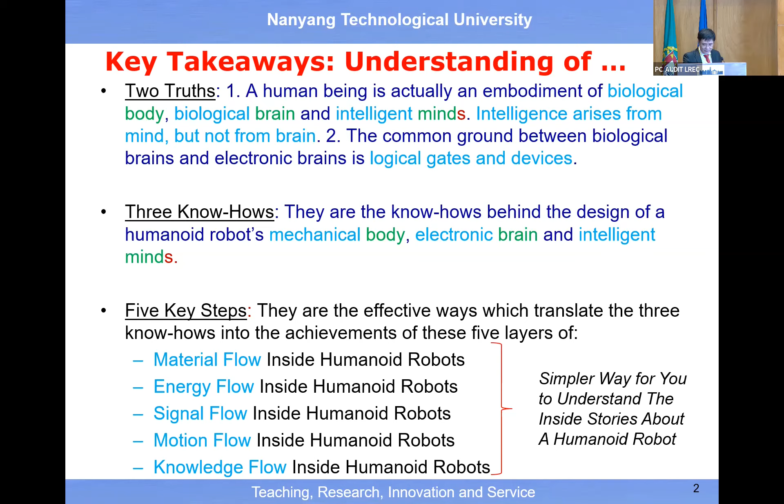Then in order to help us to understand how to translate these 3 know-how into solutions for the achievement of the design of humanoid robot, I try to group all the related topics into these 5 layers of flow: material flow, energy flow, signal flow, motion flow, and then lastly, knowledge flow, right? So I can skip the introduction about myself. So let's start with today's keynote speech.

So basically, I will follow this guideline, and today's talk includes 2 parts. One is philosophical, and the second part will be more technical, all right? So in the philosophical part, I will try to answer these 2 questions: why to focus on humanoid robotics research, and what are the know-how behind the invention of a humanoid robot. And the second part will be more technical. So I will zoom into the detail about these 5 layers of flow, okay?

So let's start with the answer to this question: why to focus on humanoid robotics research? One way to answer this question is quite straightforward. If we look at our mission on Earth, basically we have 2 major missions. Number 1 is to understand the world. Number 2 is to improve the world. Then how to understand the world, how to improve the world, and obviously research comes first, all right?

Therefore, we want to know what is the objective of research, what should be the driving force behind the research, what should be the outcome of the research, right? So here, I believe research has only a single objective, which is to create value, by finding better ways of solving the problem. And there are 2 driving forces behind research. One comes from scientific problems, and the second one comes from social need, right?

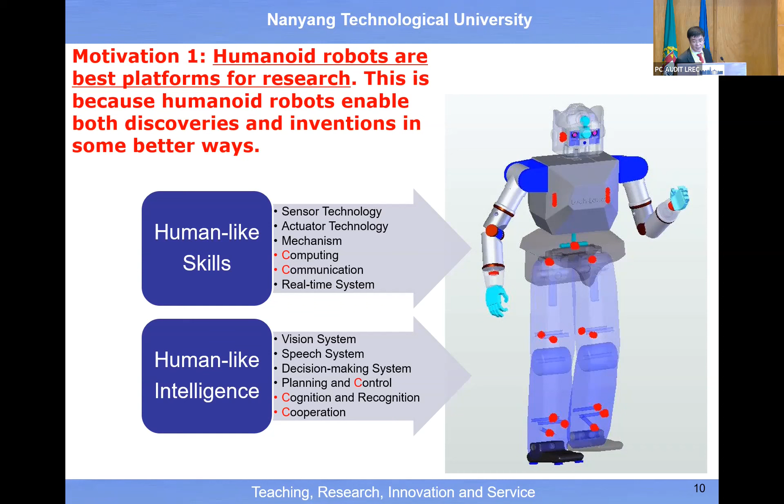Also, people talk a lot about cooperation, but without cognition capability, it is very difficult for us to cooperate with a robot or machine, etc. Right? And the second motivation is because humanoid robots are the best platform for prototyping. Because inside the humanoid robot, we have a module for manipulation, a module for grasping, a module for leg locomotion, and also a vision system, speech system, etc. So this is the best platform for us to do prototyping.

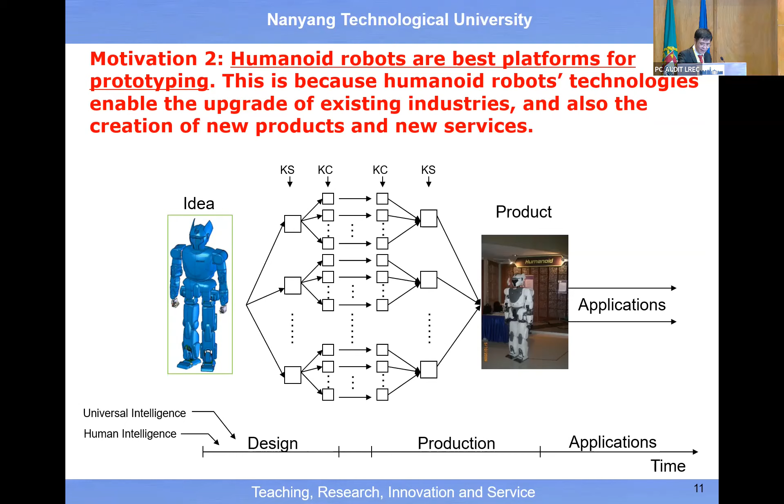The third reason is humanoid robots are the best platform for education. Today it's very difficult to teach STEM in school. Therefore, we can develop a robot tutor, let the robot play with the students, and in this way cultivate the interest of students in learning science, technology, engineering, mathematics, etc. So these are the three motivations.

The next question you may ask is about the readiness for us to venture into humanoid robotics research. The answer is yes. Actually, we are ready to venture into humanoid robotics research. And in particular, I believe humanoid robotics research will drive AI research. Later on, I will highlight a little bit. The AI research has a special history. And we have three strong foundations which are ready for us to leverage on in order to venture into humanoid robotics research. These three foundations are robotics, computer science, and artificial intelligence.

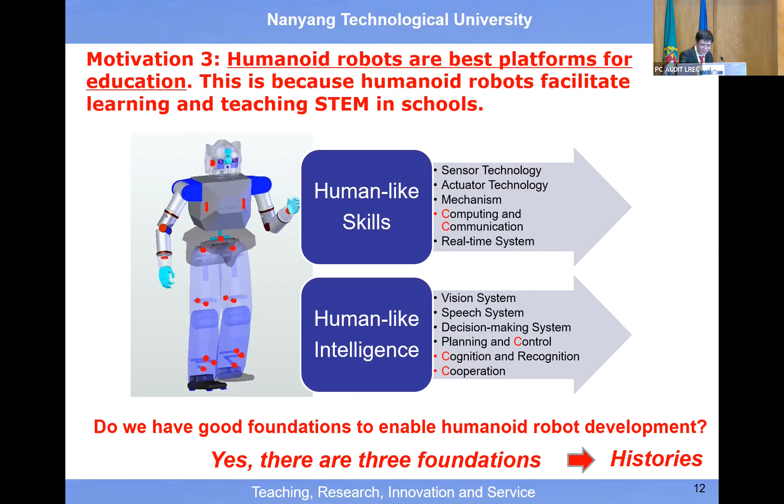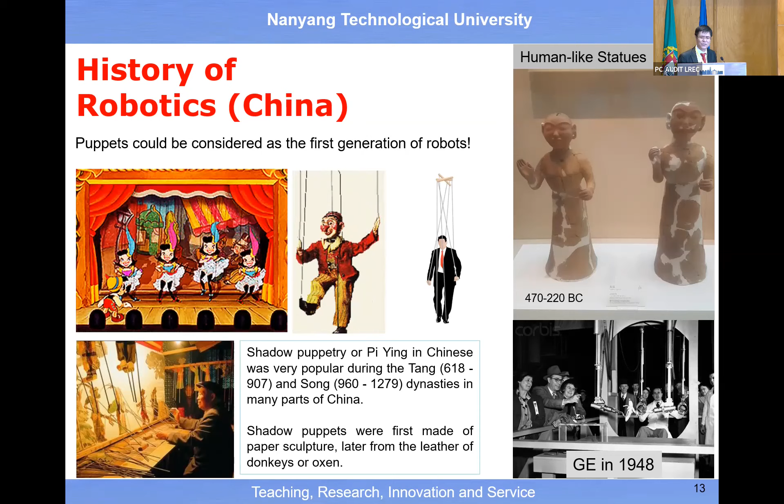So I'll just quickly go through the history of robotics, the history of the electronic computer, and the history of artificial intelligence. In this way, you understand we have three strong foundations for us to venture into humanoid robotics research. If you look at the history of robotics, it is quite interesting to discover that the first robot actually was invented in China, if we agree that teleoperated robots are part of the robot family. The puppet or shadow puppet actually is the first generation of teleoperated robot.

Okay, so I skipped the video. I have recorded a keynote speech placed on YouTube, and it lasts more than 2 hours. So here I'm not going to play the video, otherwise I may not have enough time to go through the key points. And obviously the key contributions in the history of robotics come from Western countries. The terminology of robot, the terminology of robotics, the 3 rules in robotics, all these are contributions from Western countries. And the first industrial robot and the first company which commercialized robot products all come from Western countries.

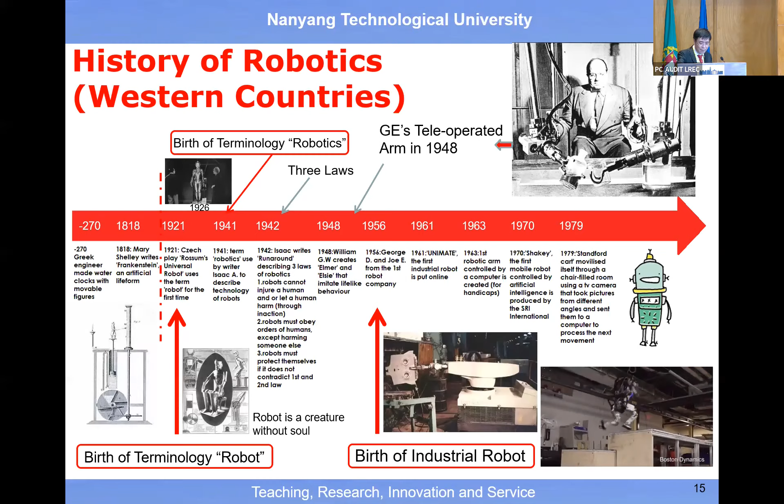However, in Asia, Japan is a special country which continues the tradition in China, and with government support, they have made tremendous progress in the development of different types of robot prototypes. And if you look at the top 4 industrial robot companies, actually 2 of them come from Japan. In terms of humanoid robot research, Honda's prototype is among the best in the world.

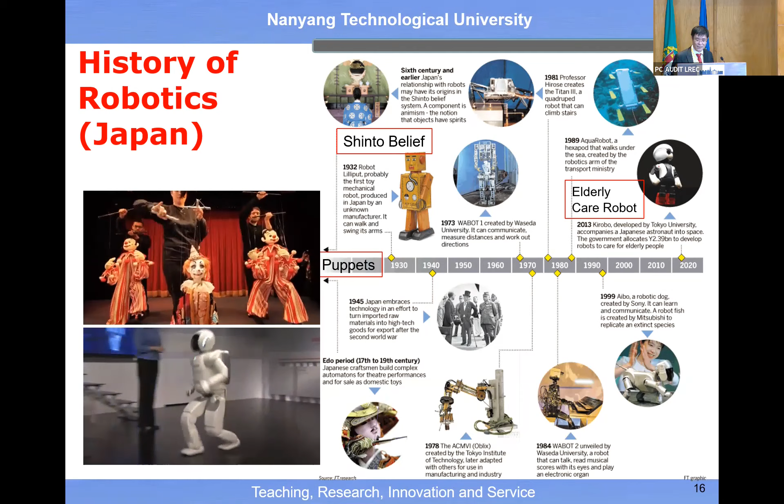Then we want to know who are the major players in humanoid robots around the world. In Europe, we can name countries like France, Italy, the United Kingdom, and Germany. And recently, Ameca attracts a lot of attention from the media. The top players in Asia obviously come from Japan, South Korea, and China is catching up. In the United States, the leader should be Boston Dynamics, and Elon Musk also wants to venture into humanoid robotics commercialization. So this is quite interesting for us to see. This has become a very hot topic.

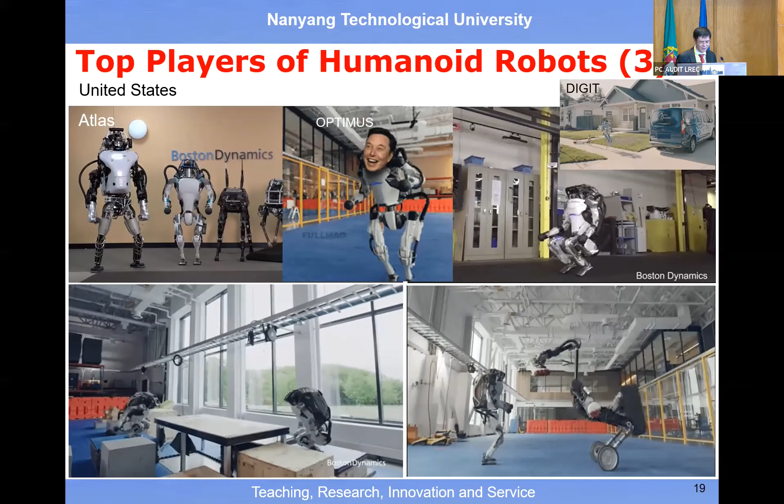In addition, DARPA has launched a robot challenge, and that robot challenge actually is a humanoid robot challenge. It was launched in 2015, and the scenario basically is for a humanoid robot to achieve certain tasks in an environment made for humans. So from here you see, a humanoid robot eventually could serve as a robot worker, robot helper, robot driver, robot tutor. So it could play a lot of roles.

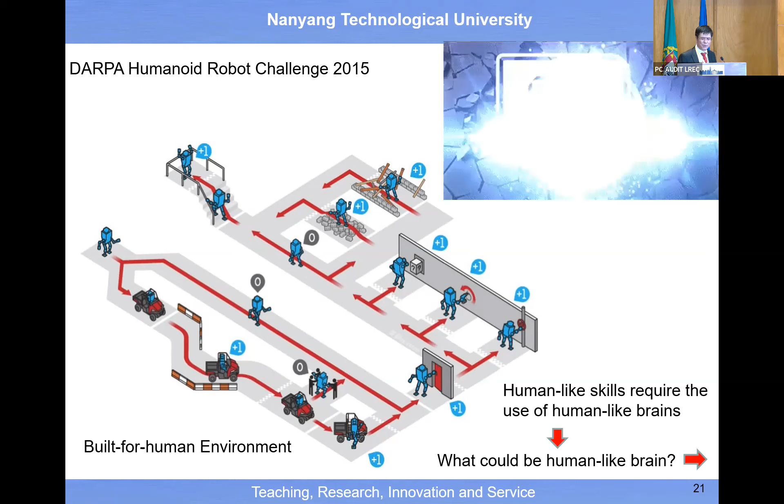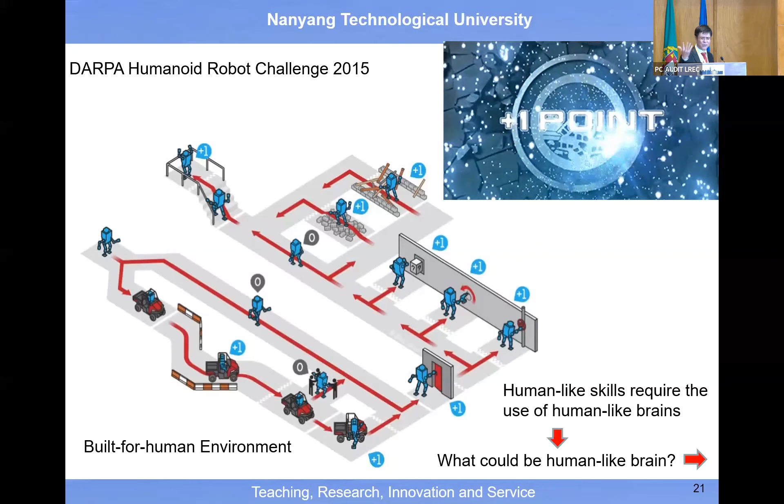Then we want to know, in terms of skill, if you look at the skills demonstrated by ASIMO and by Boston Dynamics' humanoid robot Atlas, there's not much difference between human skill and robot skill. Then how about human-like intelligence, or a human-like brain?

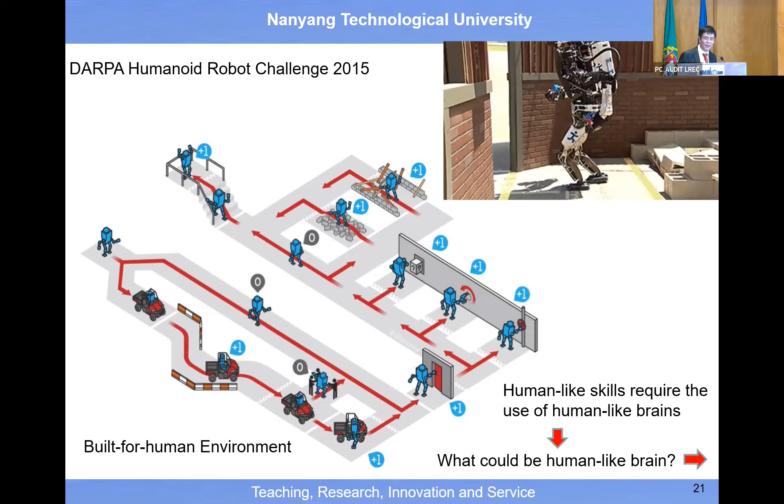So actually, there is a big gap there, right? So then the good news is in parallel to the robotics history, there is a computer science history. And there's a very, very important person in the development of the electronic computer. Also, before the electronic computer, there were some inventions of mechanical computers. But today's major contribution, I guess, comes from John von Neumann.

And also he wrote a book about the similarity between the human brain and the machine computer. But unfortunately, he passed away before he could finish his book. And there are many other people who tried to write a similar book about the similarity between the brain and the computer. This is a very, very interesting topic to think about, the similarity between the human brain and the electronic computer, right? So now let's look at the history of the electronic computer.

And then you will see actually the first generation of electronic computer was developed in 1945 at Pennsylvania University, but this was a military project. Then subsequently, we have gone through at least 4 generations of electronic computer. Generation 1 makes use of the vacuum tube, generation 2 the transistor, generation 3 the integrated circuit, and generation 4 the very large scale integrated circuit. Then we may ask, what will be the next generation of electronic computer?

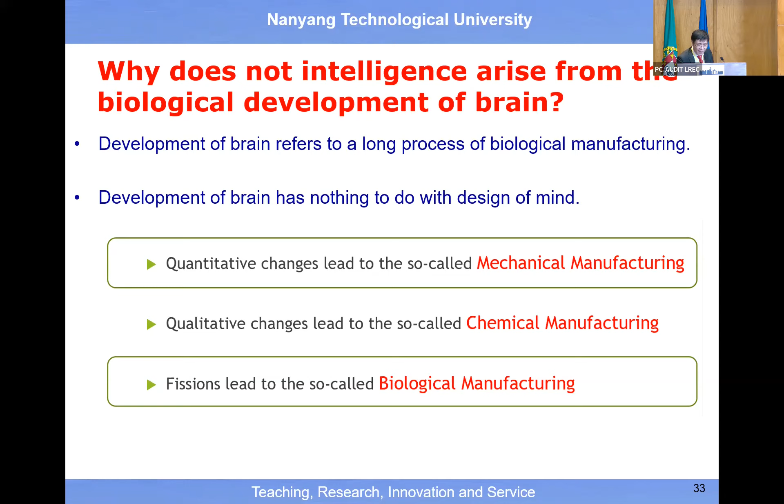Okay, and here I actually have a full video to support this conclusion. Okay, why intelligence arises from the mind. But due to the time constraint, I skip this one, because you can watch the recorded keynote speech.

And you see today a lot of research, a lot of investment into learning, deep learning, etc. And in year 2003, I already set this condition: for anything to have a capability to learn, you must reach this level of being educable, right? I guess it is at the end of my book. And also 1 year later, you see the Bill Gates statement: if we make any breakthrough in artificial intelligence and machine learning, then the result will be worth 10 Microsofts. And today, we do not see the breakthrough, right? So then what's wrong with AI research in the past 17 years?

So here I give a comparison. One is because we believe mind is what the brain does. Actually the truth should be mind is mind, brain is brain, okay? And then in the old paradigm, there is a belief that the mind comes from evolution. That is wrong, because evolution corresponds to biological manufacturing. Manufacturing has no direct relationship with the design of a product itself. So it's quite clear. Mind comes from design. That should be the correct conclusion. Development without the design is wrong, because development corresponds to manufacturing, and production always comes after design. You do product design first, and then you do manufacturing or production, etc.

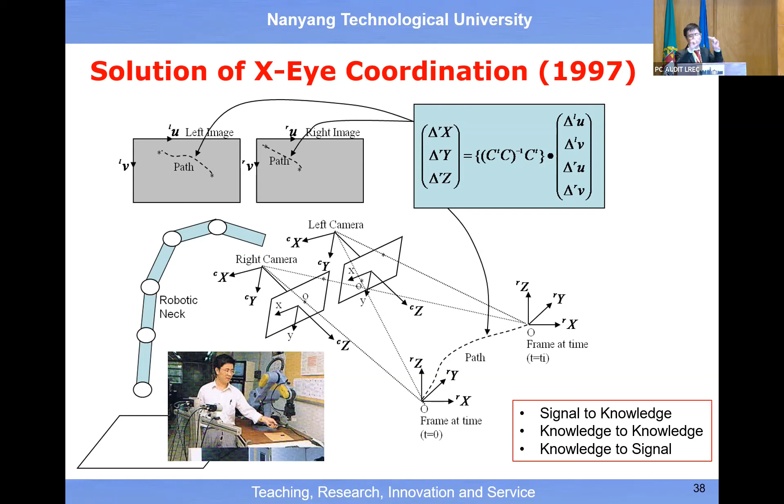So this is actually this closed loop already. Transformation from a sensory signal to knowledge, knowledge to knowledge, then knowledge back to motor signal, right? That should be the key focus of AI research, right?

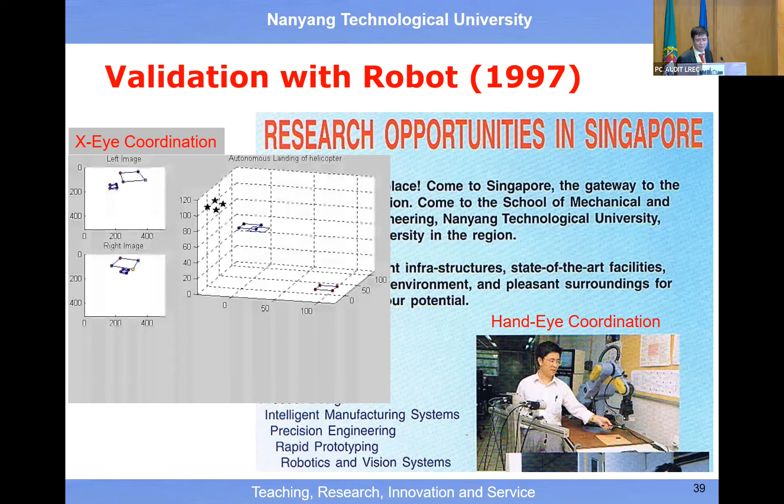Then here we do a simulation, and this result has actually been broadcast on the national TV in Singapore because we validated this result with a robotic arm at that time, all right? And this result has been shown on the national TV. Okay, so I move on.

And 10 years later, at Pittsburgh University in the USA, they did a study and actually validated the result with a monkey, right? So they use the monkey's eye, the monkey's brain, get the signal, then control the robotic arm. Then you see that the loop has been closed, etc. Right? So it's also quite interesting.

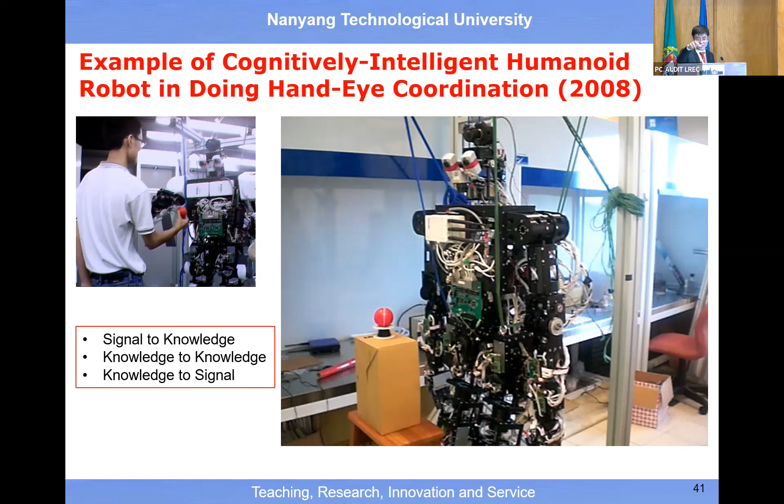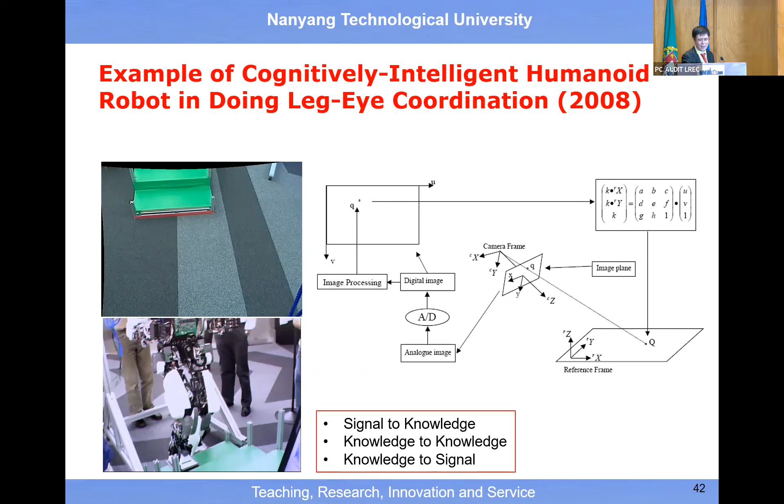And then subsequently, we move on to do hand-eye coordination. Actually, hand-eye coordination is a typical example of this outer loop of intelligence, because this outer loop includes a transformation from signal to knowledge, knowledge to knowledge, and then knowledge back to signal, etc., right? So then for legged locomotion, this video has also been demonstrated to the Ministry of Defense in Singapore, because this project was supported by the government.

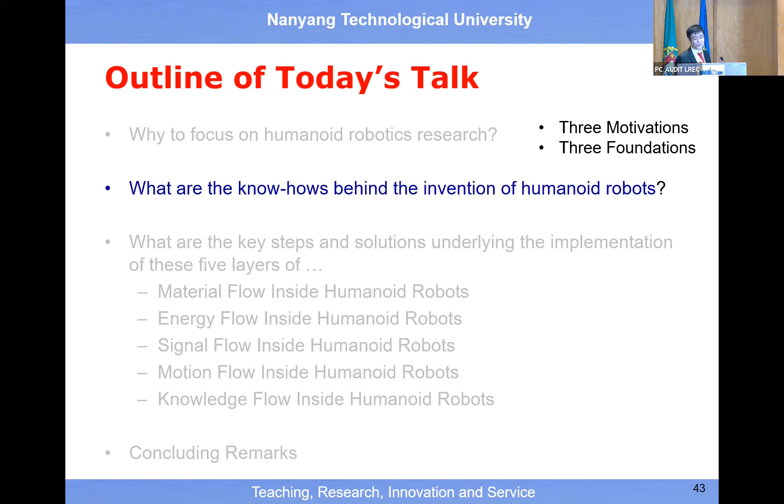Okay, so that gives you, I guess, a strong answer about the motivation for us to venture into humanoid robotics research, because we have 3 motivations, we have 3 foundations. So then the next question you may want to know: do we have enough know-how so far for us to venture into this direction? Then what should be this know-how? The good news is we have 3 know-hows.

And in order to develop a humanoid robot, we need to know what is a humanoid robot, right? And in order to answer this question, we need to know what is a human being. Now, in the research community, there are 2 versions of the answer. Most of us believe that the human being is the embodiment of the body and the brain. That's it. But that is too simplistic an answer. So we must clearly spell out that the human being is an embodiment of the body, brain, and the mind. Brain is brain, mind is mind.

In particular, you can do a little bit of research to find the textbooks written by people in religion more than 2,500 years ago. I guess 2,500 years ago, there were no science journals, right? But it's very interesting. The textbooks in that period already tell us what is a mind, what is intelligence, and also what is life. Because more than 10 years ago, I was also interested in this question of what is life. I did not know the answer. And suddenly I discovered that actually in religion, they know the answer.

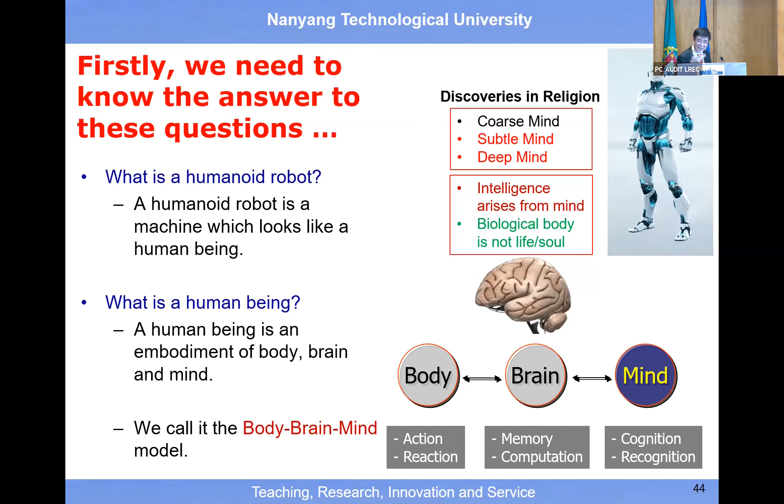So it's very simple. But today we have YouTube. There is a lot of evidence that you can find on YouTube. But the problem is people in religion do not know today's terminology in science. This is why they are not able to explain it to the public with today's terminology or today's language, right? So this is just for you to know.

Then with all this knowledge, if you consolidate all these findings in science and in religion, it's very clear to us. Today the definition of robot should be like this: a robot is an embodiment of a body, brain, and the mind, which could undertake execution of motion, performance of a task, and most importantly interaction with people, in particular interacting with people at the cognitive level, not just at the signal level, right?

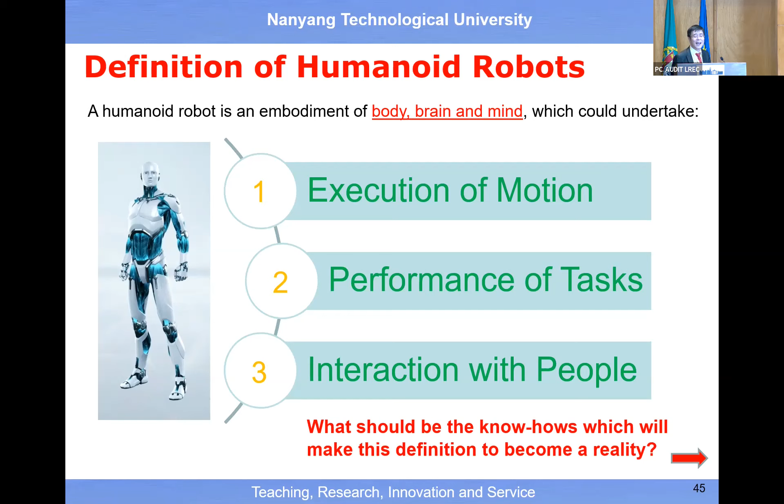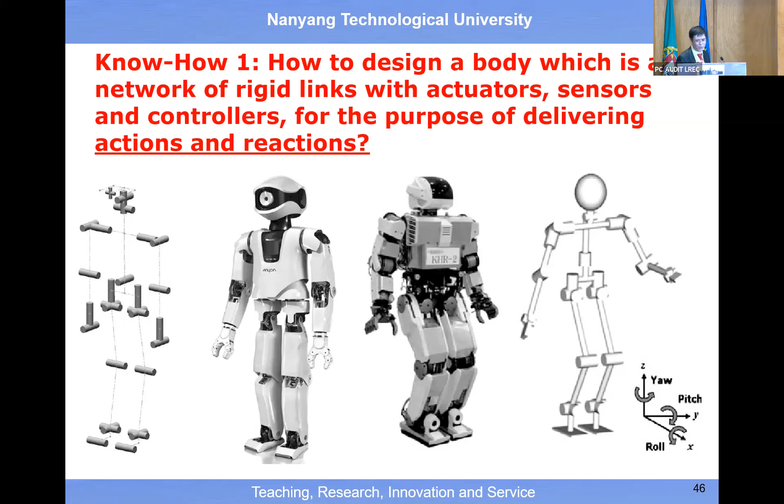Then, if we agree with this definition, what should be the know-how for us to achieve the invention of this type of robot or machine? So know-how number 1 should be the design of a robot's body, but today there's no issue at all. With today's advances in robotics, we have all kinds of actuators, sensors, controllers, etc. All right.

Then the second know-how is how to design a robot's brain. Okay, but here is what's interesting: the design of the brain, which is a massive network of neurons for the purpose of creating numerous CPUs and a huge memory. But here you see, should we just stop at this statement, a network of neurons?

But the good news is with the neuron, we are able to come up with the solution for logic devices such as the AND gate, OR gate, and XOR gate, etc. Here I just show you some examples. Then with these logic devices, you will see what today's electronic computer is. You must say today's electronic computer is a massive network of logic gates and devices, not transistors. If you just say today's computer is a massive network of transistors, it does not make too much sense, all right?

So interestingly, if we move one level up, then we unify the human brain and the electronic brain. Both of them could have this common ground of logic gates and logic devices, right? Then with logic gates and logic devices, in computer engineering it is common knowledge that we are able to come up with a solution for memory and a solution for the ALU, right?

Then in this sense, we must think about what the true nature of a human brain is. So a human brain should be a massive network of logic gates and devices for the purpose of doing memorization and also computation, right?

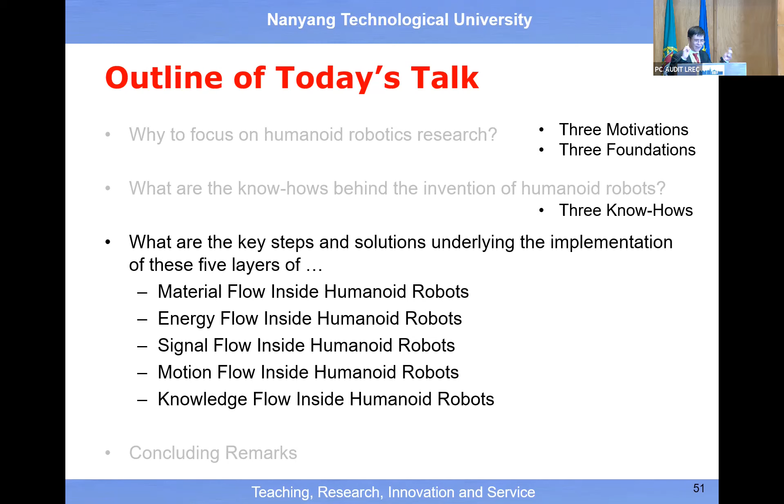Right? So now I'll quickly go through these five steps, which explain how to apply the know-how in these three domains to the actual design of a humanoid robot. Maybe this will help you understand the relationship among all the topics involved in the design of a humanoid robot.

Right. So you can add in more. Okay. So these are the major topics in robotics. And all of them will contribute more or less toward the achievement of these five flows. Okay, so let's start from the flow of material, right?

So then for the hardware, the material flow is actually involved in the design of the body, but also in the design of the brain, because the brain depends on the material. So therefore, we want to know, what is a body? A body in robotics, we know that it's just a network of links and joints, right? And inside the joint, we have an actuator, we have a sensor. Then to control the actuator, we need to have a controller. So this is quite straightforward.

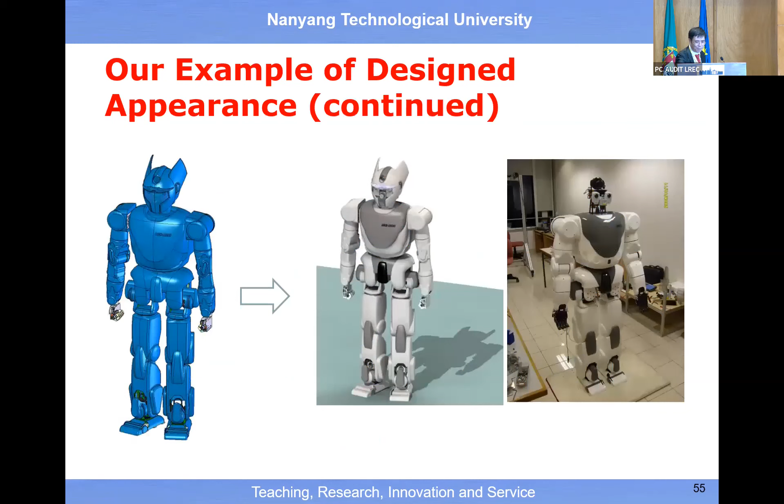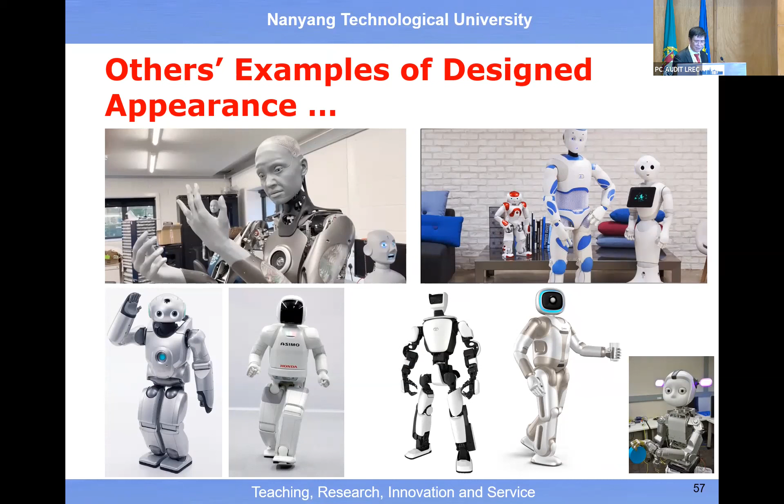So currently we have the know-how about the material flow inside the body, and the know-how about the material flow inside the electronic brain. We have a full understanding already. So there's no obstacle. Then in terms of mechanical body for appearance design, this is just an example of what we have done. And this is the prototype of the robot that we have developed with government funding. And then there are many other types of appearance design, mechanism design, and structure design.

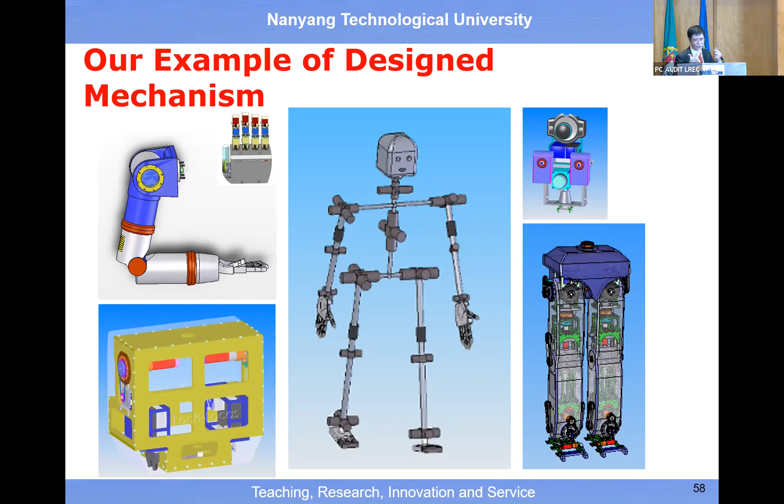Then in terms of mechanism, this is our research work, but not much different among all the humanoid robots. So you have a mechanism for the arm, for the hand, for the upper body, for the leg, etc. The only slight difference is the modular design, because this is our attempt to come up with a single module with 2 DOF. By putting them together, we can form the arm, form the leg, etc.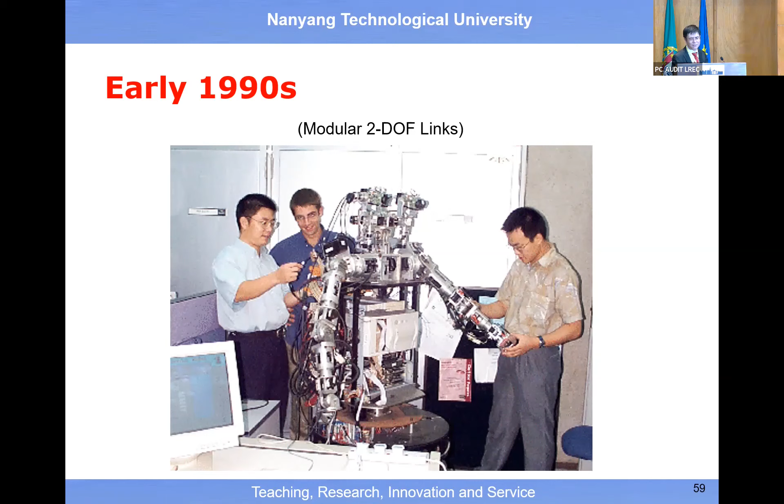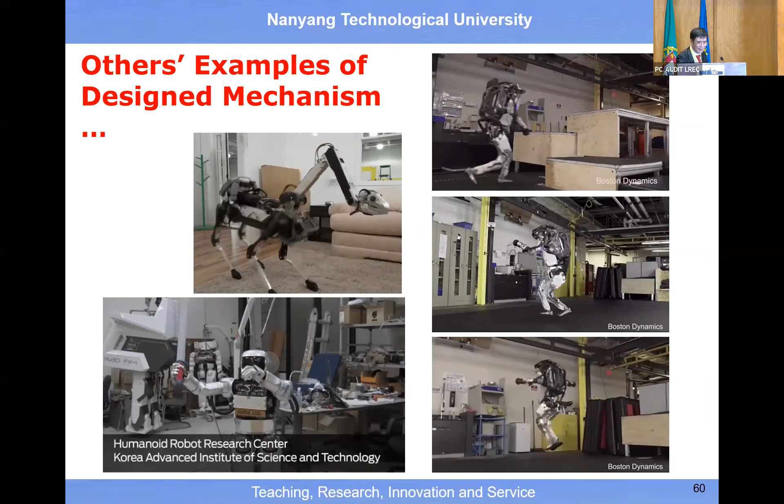So we have done some research in this direction, and then there are other people's results for the achievement of mechanism design. You see the Boston Dynamics robot, and I guess this one should be from KAIST in South Korea, the HUBO, etc. Then, okay, this is an interesting part.

In computer engineering, we already have a very good understanding about how to build the CPU and how to build the memory unit from logic gate devices. Inside the logic gate, we have transistors. But our conclusion should be that the brain is a massive network of logic gates. You should not say the electronic brain is a massive network of transistors, because that kind of statement does not help people to pay attention to the focus.

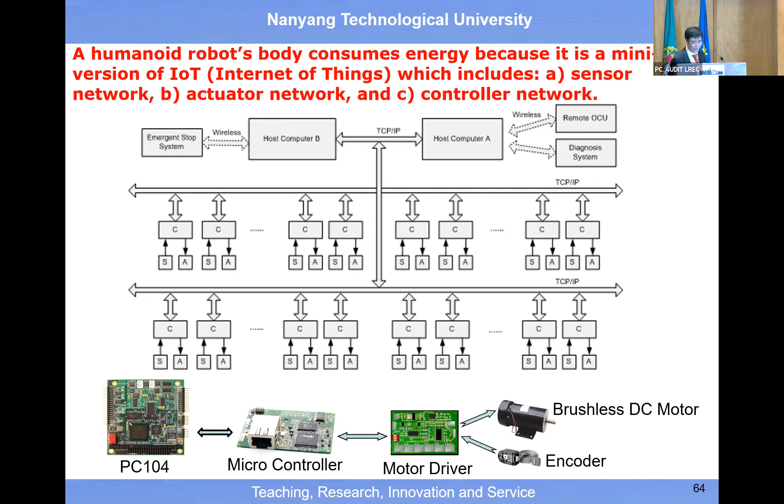Okay, and one way to understand this energy flow is from the viewpoint of IoT, the Internet of Things. Actually, a robot is a mini version of IoT because a robot is an Internet of sensors, Internet of actuators, Internet of microcontrollers, etc. Right? So then we need to have distributed power supply to all these energy-consuming devices, etc.

Right? So let's say for the controller dedicated to the motor, or the controller dedicated to the high-level reasoning or cognition, recognition, etc., we need the power supply. So therefore, the solution should be distributed power supply. And the only thing is how to make the power supply last for longer hours, such as 4 hours, 8 hours. I guess we are among the first to make use of a fuel cell.

All right, so with government support, 12 years ago, we had the fuel cell power supply system. It could last for 4 hours, 8 hours, okay? So it is better than battery, all right? So the only development we need is to further advance to lower the cost, because the fuel cell power supply system is quite expensive. The battery is cheaper, right?

And another innovation could be how to convert electric power into mechanical power. The conventional solution is to do one-to-one conversion. At each joint, we have a motor, right? Then a motor is a mechanical power supply. You take electric power as an input, mechanical power as an output, right? And if one motor fails, the entire arm will fail, etc.

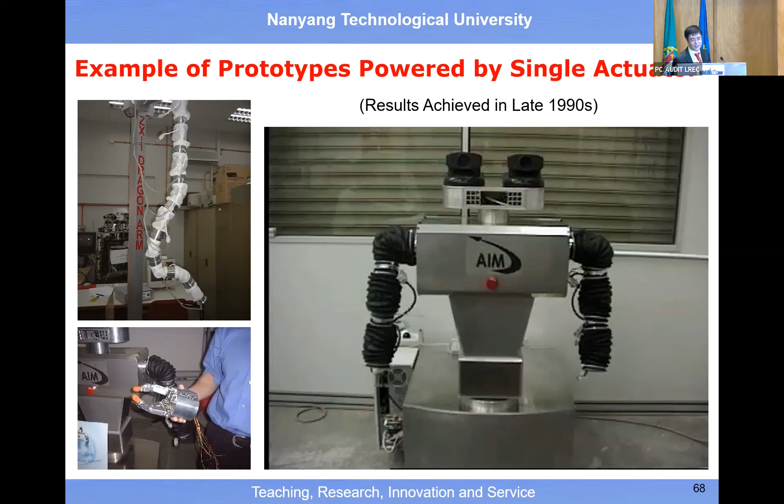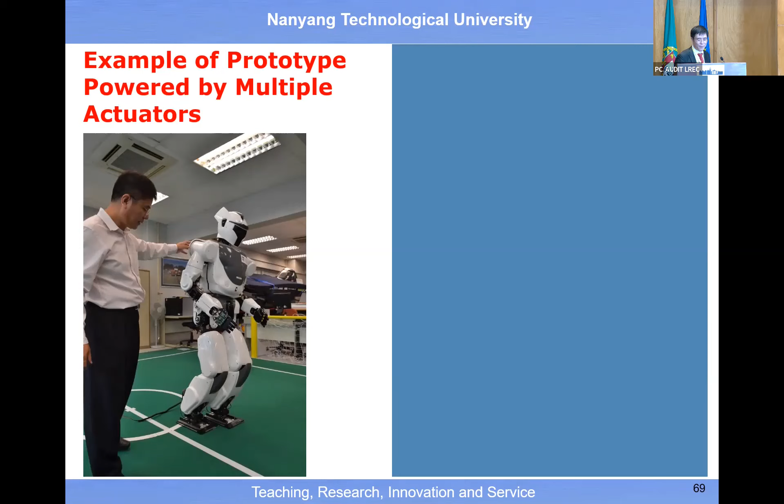Okay. So I'll just move on. Then, other results for the transformation from electric power to mechanical power. I can skip all these videos, right? So this is an example done by others.

So in terms of energy flow, just remember inside we have maybe electric energy or chemical energy. If you use a fuel cell, the input is chemical energy, then we must convert it into mechanical energy, right? So the only concern is whether we have a one-to-many conversion or not with a single motor, to build up a network of distributed mechanical power, etc.

Now the more complicated part should be signal flow, right? So it's like a human being. We are living inside an ocean of signals, right? Actually, we are like a fish, we are surrounded by all kinds of signals. And then we have a very, very powerful sensory system to transform all the sensory signals into cognitive states, or knowing the meaning behind the signal.

Then could we make today's robots have the same feeling? So they are living inside an ocean of signals, and they will feel comfortable handling all kinds of inflow of sensory signals, right? And besides sensory signals, we also need to have control signals, right, to control our muscles, control actuators. So this will be a very complicated flow or layer for the design of a robot, or for the design of a humanoid robot, right?

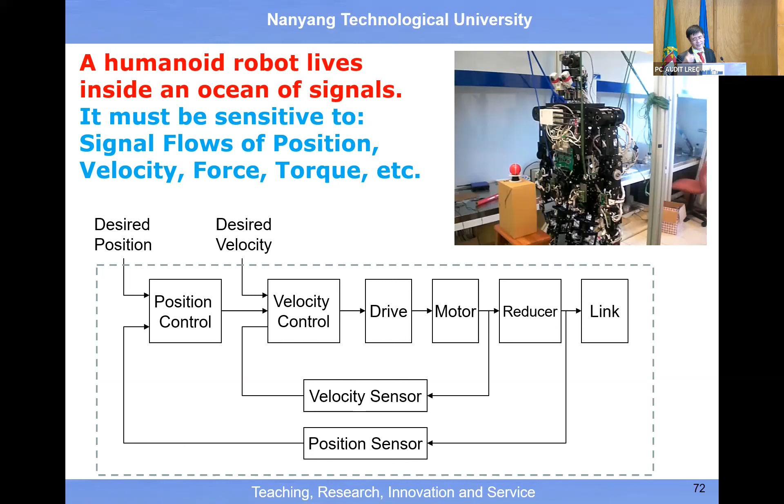So here is just a simple example of, let's say, position control with velocity in the loop, etc. Okay, so good news for us is with advances in control theory, we know how to handle feedback control. As long as we know what the desired position and desired velocity should be, then outputting the desired motion should not be an issue, all right? Then for grasping, again, we also need to have signals about the pressure, tactile sensors, etc. Right?

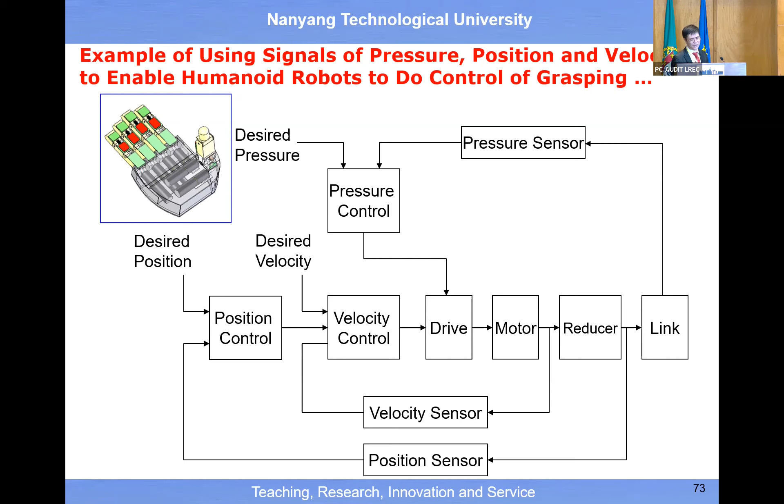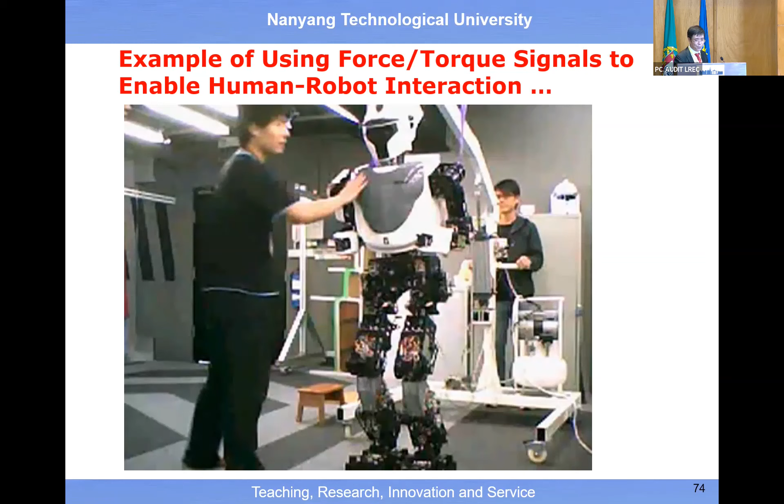So then once we know this signal, it's not an issue for us to close the loop to achieve desired motion, and also the force torque sensor, etc., for us to achieve human robot interaction, which makes use of force signal, torque signal, etc. Right? And also visual signal, right?

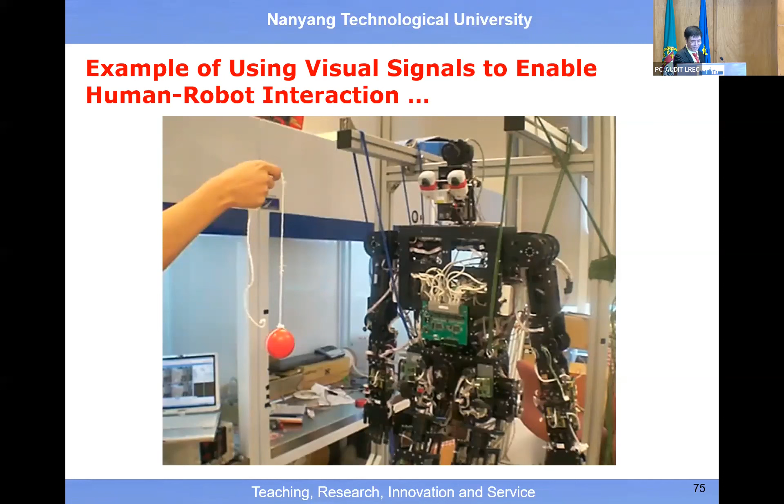So today we have a camera to capture the inflow of a visual signal and try to understand the meaning inside. But it's still a big issue, right? This is, I guess, one of the most challenging ones, because for us, we have the capability to understand a photo, understand an image. But I will talk about this when we reach the knowledge flow. So this could be a challenging part.

Then for voice, this also could be a challenging part. But just treating the voice as a simple signal should be easier, right? That means interacting with a robot with the use of acoustic signal should be easier. But how to interact with the robot with the meaning behind the acoustic signal, that should be a challenge, right?

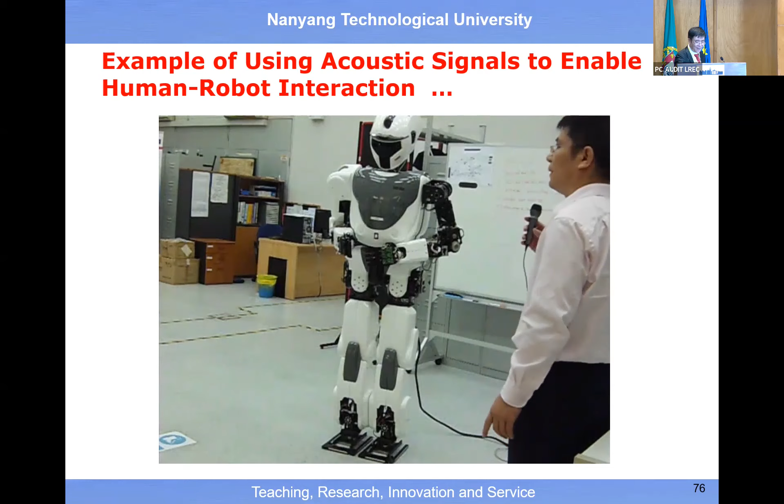And you will see today a lot of research groups try to combine vision and speech together. Actually, for both of them, the output could be more or less the same. So it's knowledge-based output, right? And something special to robots should be the motion. Without the motion, the robot would be useless. So the two key words behind robotics should be motion and intelligence, right?

And today we are more or less very comfortable with achievements for motion-related results. However, now we need to put in more effort to achieve intelligence-related results. But motion flow is also quite complicated, because we can talk about motion related to locomotion, manipulation, grasping, and if the robot can fly, can swim, can dive inside the water, then you see it's quite complicated.

And in particular for the theme of this conference, one keyword is walking, another keyword is climbing. For walking, the biggest challenge should be stability, and stability actually refers to the stability of a motion controller for walking or climbing. So this should be one key focus for the theme of this conference, right?

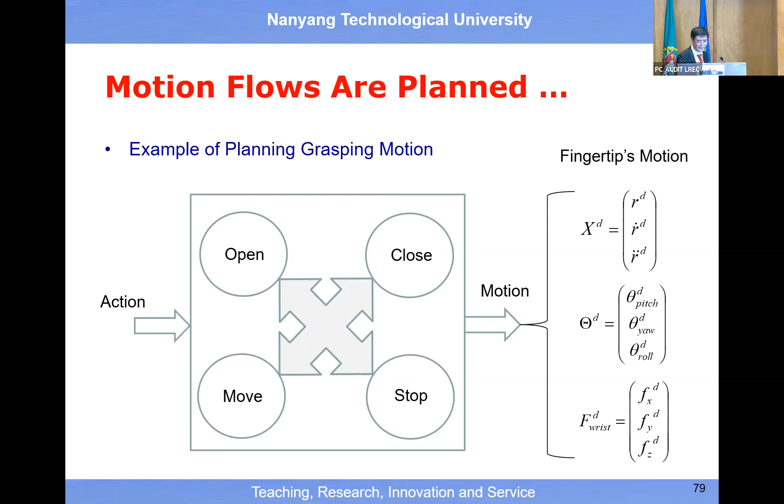And here I show you the motion description in task space. Once we know inverse kinematics and inverse dynamics, we can move this motion equation from task space to the joint space. Then for manipulation, it's the same: try to relate motion description with action at the higher level. Above action there's a task, and on top of task, eventually a job or mission. So this is a pipeline of a flow from knowledge to motion.

Then at the action level, you will see manipulation involves push, pull, grasping, throw, follow, etc. Once you go to the lowest level, it's more or less the same, because we can always assign a coordinate system to the tool tip or fingertip. Therefore, at the lowest level, the motion equation should be a time function of the XYZ coordinates, and a time function of the angular position theta, something like that.

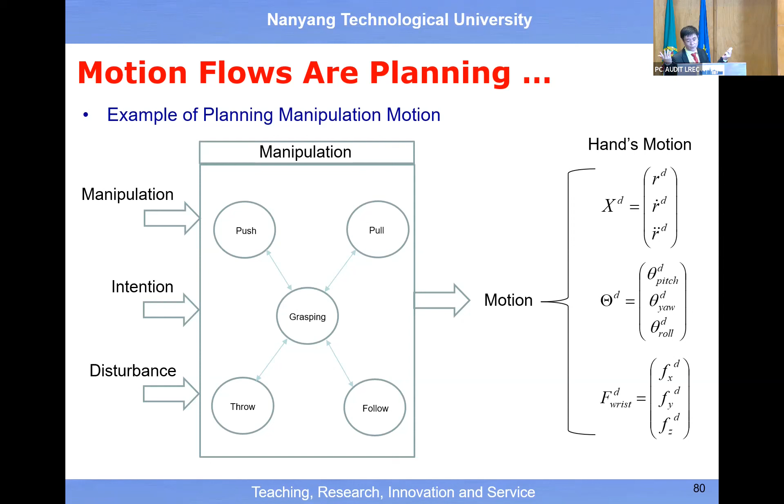And eventually interaction force, which involves 3 force components, 3 torque components, etc. Right? And the complicated part should be the biped walking. Then you see we have 2 legs, and each leg can undertake some action, right? And by combining these 2 legs in different ways, then we have a rich set of gaits, right? Pacing gait, walking gait, trotting gait, and cantering, galloping gait, etc. Right? So it's quite interesting.

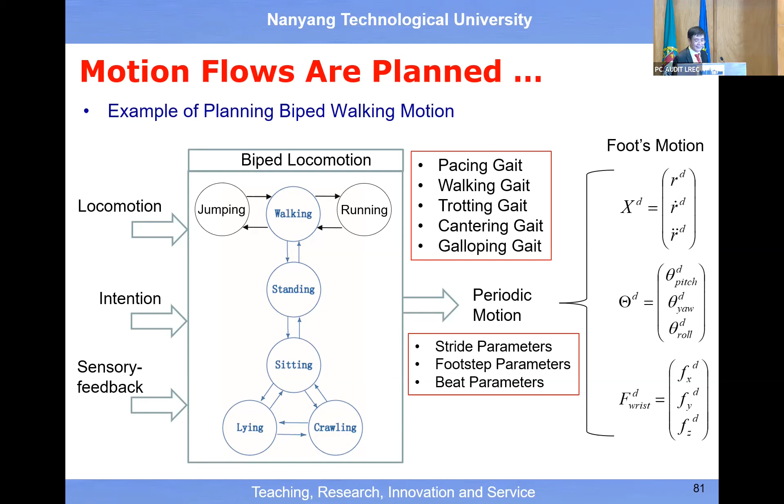And eventually, a humanoid robot can undertake crawling kinds of locomotion, etc. So this should be a very, very complicated description for the motion flow, etc. Then once we have a motion equation in task space, I guess it should be quite straightforward for us to transform the motion equation from the task space into the joint space. Once we reach the joint space, then we can directly connect it with the motion control or feedback control system.

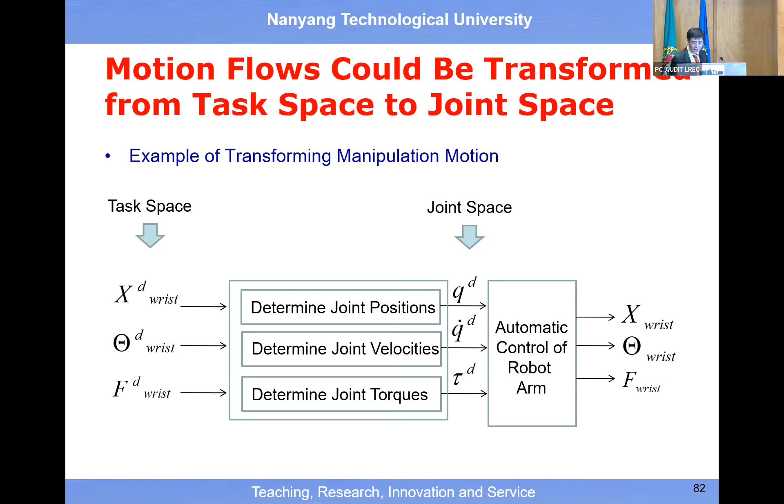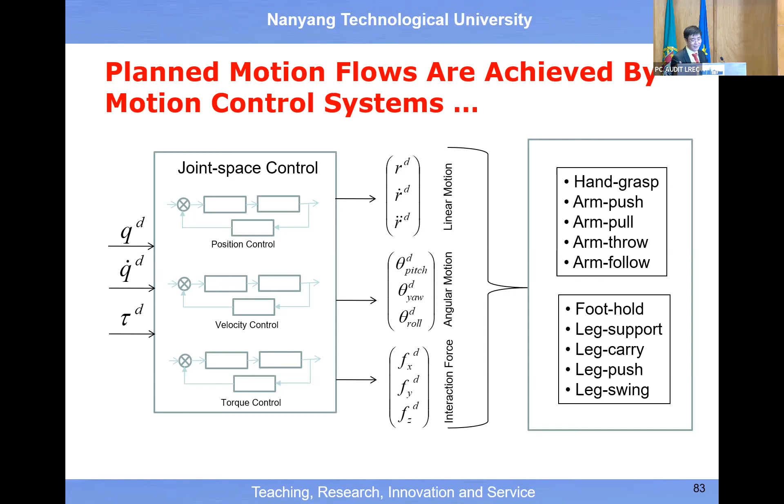Okay. Then once we activate the feedback control system, the output from the feedback control system will be the performed motion from the robot's body, right? So this should be quite clear. But the complexity is how are you going to combine all this together? You see, the upper body can undertake manipulation and grasping, the lower body can undertake biped walking, and then at the higher level we have action.

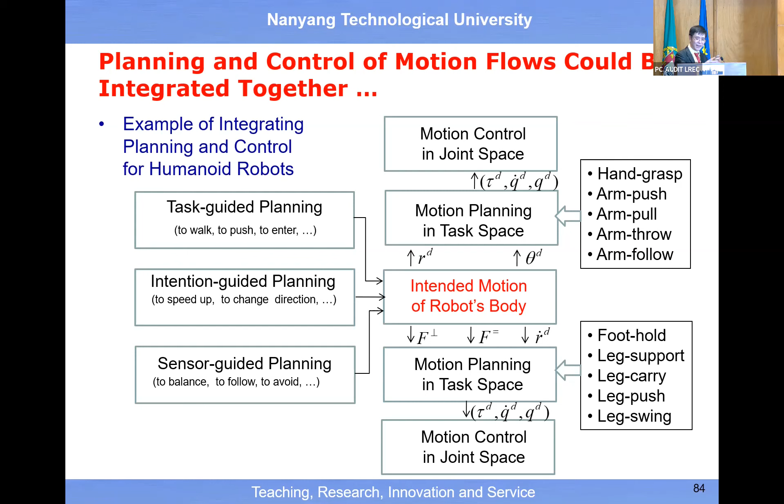Then above action we have a task. Then on top of a task we may have a job, etc. And then we may also have an intention because there's a brain layer, there's a mind layer. The robot has its own intention, and maybe the sensor may tell the robot something urgent happens, etc. You see, so that creates a little bit of complexity.

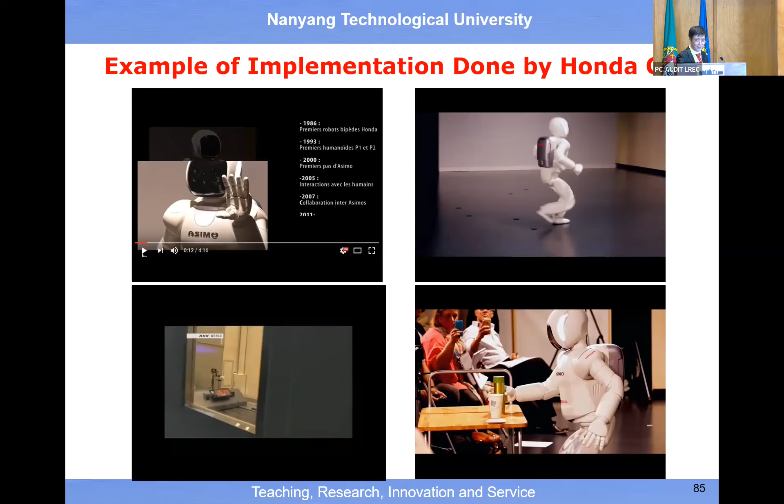But despite such complexity, with heavy investment in the private sector or by government, you see today we are able to achieve more or less human-like motion. So I'm not going to play all this. Okay, so it's not the issue at all, right? And then what should be the motion equation?

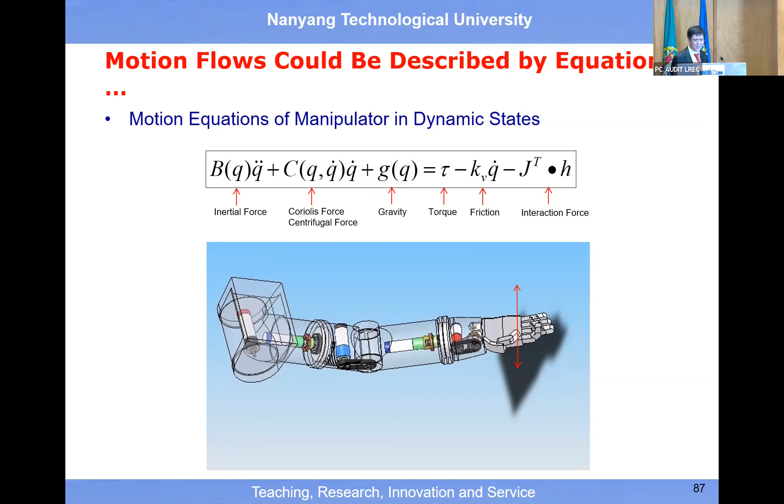I guess I can quickly go through it because in robotics, we know how to describe the motion equation which, let's say, relates the interaction force with the torque at each joint. So we can apply the static equation. Then for the dynamic equation, if we have extra energy to use in order to produce kinetic energy, then you see acceleration by the robotic arm. So we know all these equations.

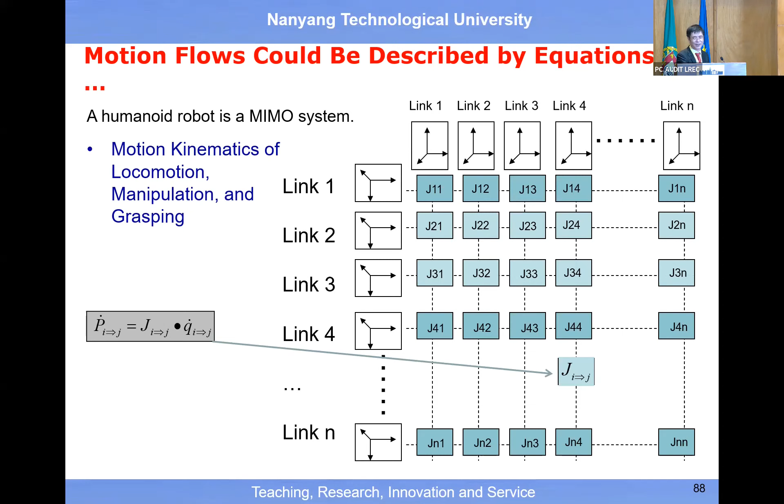One thing special is about the kinematic equation, because a humanoid robot has a network of links or joints, all right? And each link could serve as a base link. It's not like an industrial robot, where the base link is always fixed, okay? But for a humanoid robot, the base link could change, all right? So therefore, we need to have this matrix of kinematic equations, right? Then for each element inside the matrix, we know the equation. Okay, so it's not a big deal.

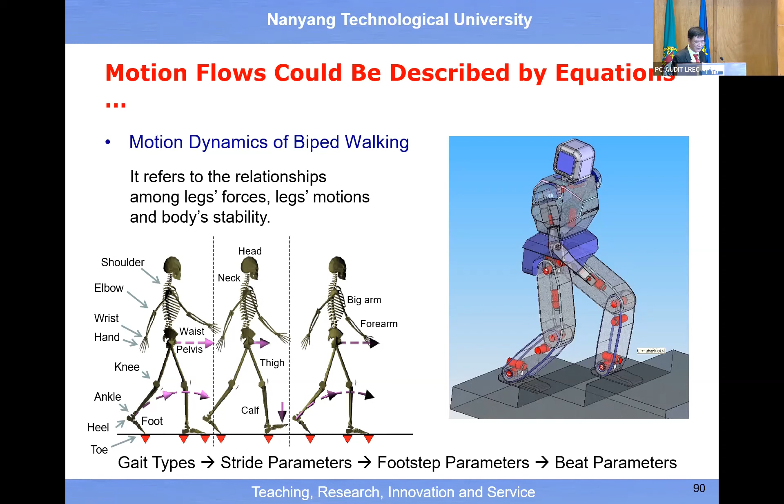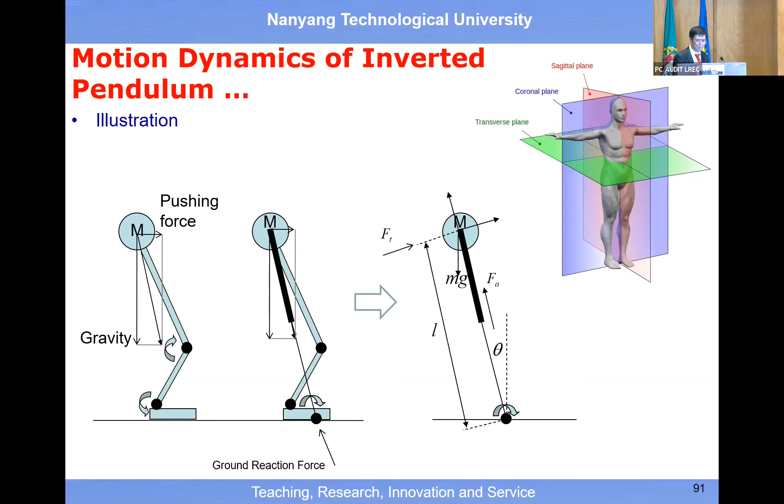But the challenge could be the dynamics description and the control for biped walking. Because due to the gravitational force, this will make biped walking become unstable. So in this area, we still have a lot of theoretical study. For example, we have the inverted pendulum model to describe the dynamic equation of biped walking. So I'm not going to enter into the detailed description of all these equations.

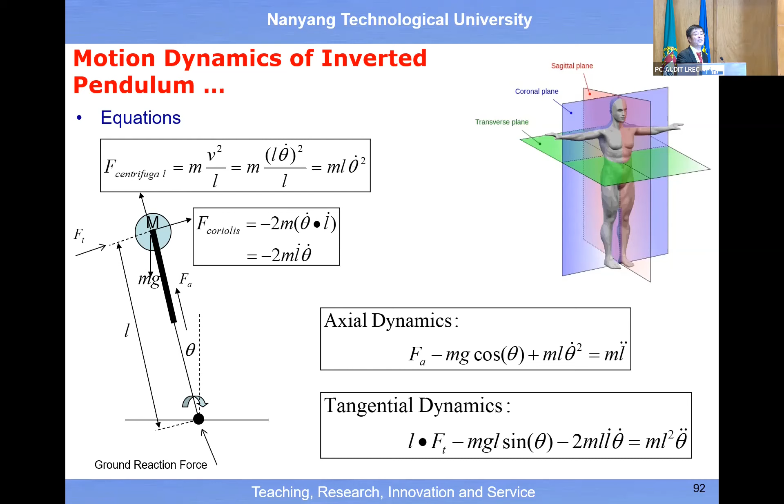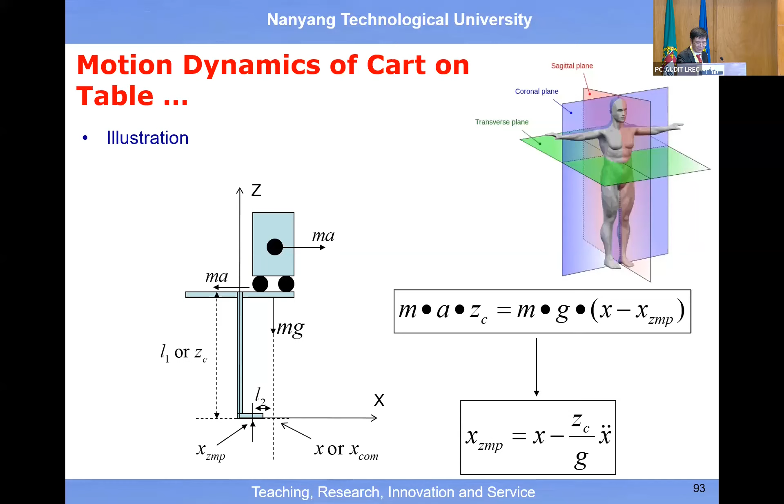Now here you see the ZMP, zero moment point. This is a very good indicator for us to monitor the stability and eventually make use of the ZMP to guide the planning. What is the next footstep, in order to achieve new stability, etc.? Right? So then we have all the detailed equations. Okay, so it's not the issue.

Okay, and actually we can also make use of results from industrial robots. We can treat the leg as an inverted arm. Then we can use the results of the static equation and dynamic equation of a robotic arm to understand the dynamic properties of biped walking, etc. Right? So this is not the issue.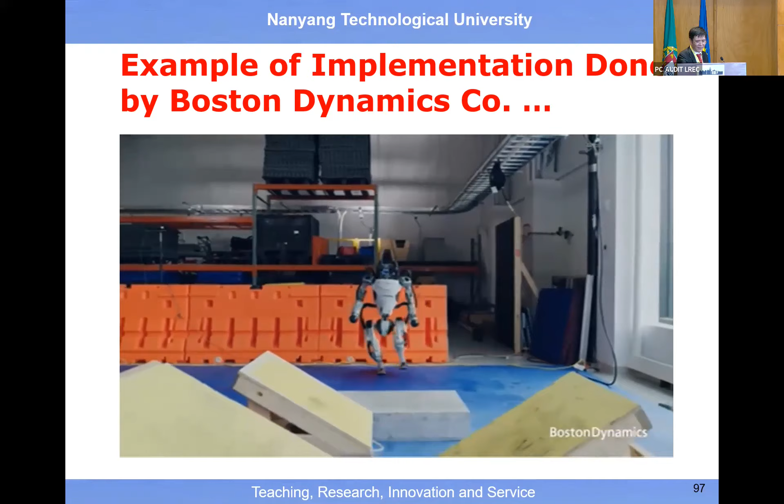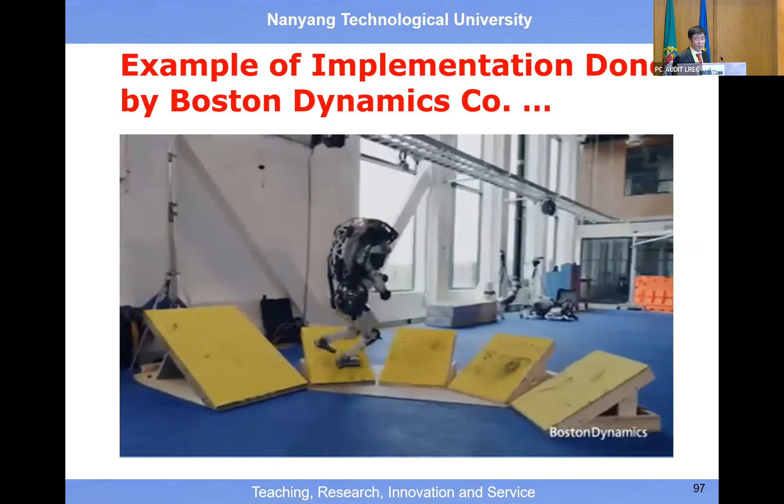And then, I believe every one of you has seen this. So just to give you a quick impression of today's achievement for robots to perform human-like skills, right? So not much difference, right? Okay.

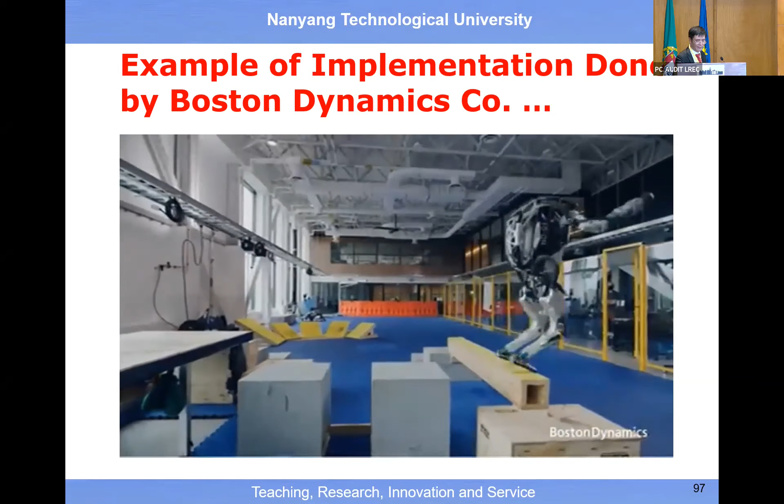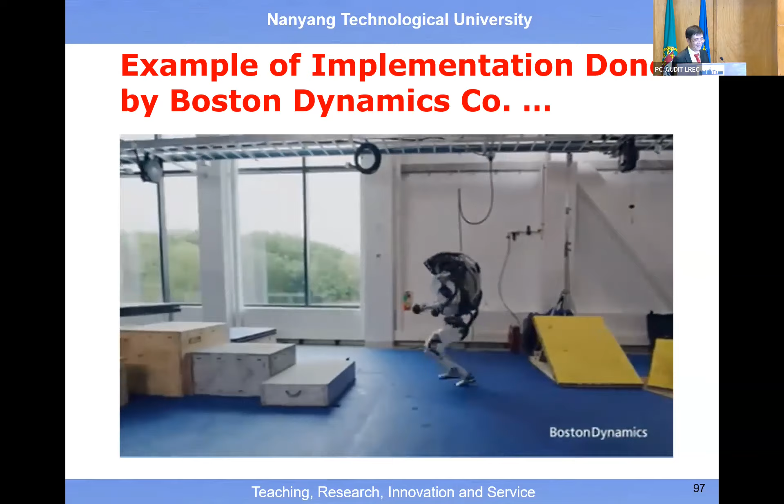So I guess I still have 10 minutes. Okay, the last topics will be more challenging. Okay, so I almost reached the last layer.

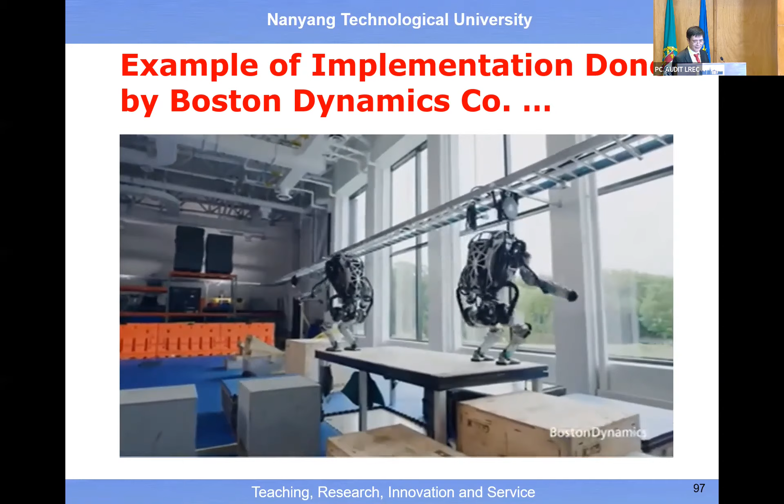In today's talk, let me give you a very convincing result about today's achievement for human-like skill. But the biggest remaining challenge should be this layer: how to achieve human-like intelligence. Today there is still a lot of discrepancy about the philosophy. And the biggest discrepancy is about the nature of a human being, because still a lot of people believe that the human being is just an embodiment of the body and the brain. Mind is part of the brain.

Actually, that does not help us to make progress. And the evidence is that AI has been in place for 70 years, 7 decades, and not much breakthrough, right? So this is why we need to move away and adopt this more accurate understanding about the nature of the human being: an embodiment of a body, brain, and mind; the mind is mind, the brain is brain, etc. In that sense, you will understand what a knowledge flow is, and what is the weak point or weak phase for us to achieve this complete pipeline of a knowledge flow. So that is very important.

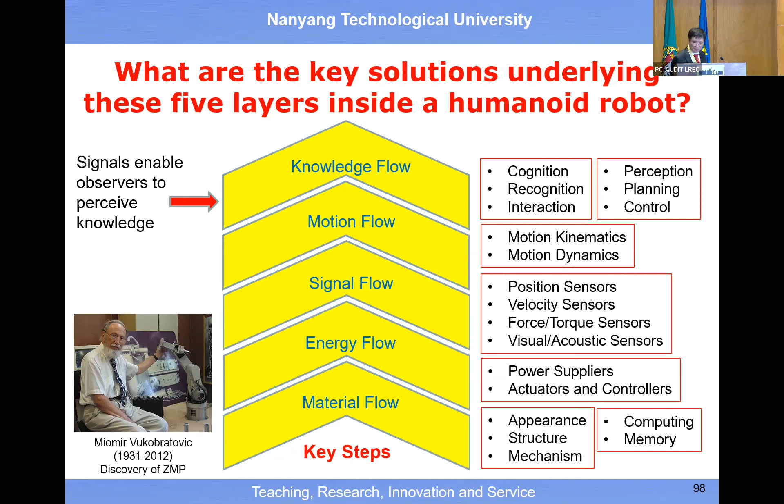And then you will see the keyword cognition. But actually, not many people pay attention to cognition. If you look at the names of labs, a lot of labs use the name pattern recognition. So recognition is a very popular term, but actually cognition is very important. Without achieving cognition, how could you do recognition? So this is a big issue. At the philosophical level, we must clear this discrepancy about the philosophy behind the development of robot man. And the goal is to achieve human-robot interaction at the cognitive level.

Today, a lot of research occurs in human-robot interaction at the signal level. You can pick up a human brain signal and use a matrix to map it into a motor signal, then do some demonstration. Signal to signal transformation is not the big deal, because in mathematics this is trivial. The big deal should be signal to knowledge, knowledge to knowledge, and then knowledge back to signal. That is the challenging part. So this is our research work.

You see, more than 15 years ago, we already had this idea of developing a robot twin. So we program a robot twin, a digital robot, and interact with the digital robot. Once everything is okay, we let the digital robot control the physical robot. And today, this has become a popular term, digital twin, etc. And now we talk about the metaverse, basically a virtual space or virtual human being. So the remaining challenge is this one. And the Singapore government has funded us a project to do research in this area.

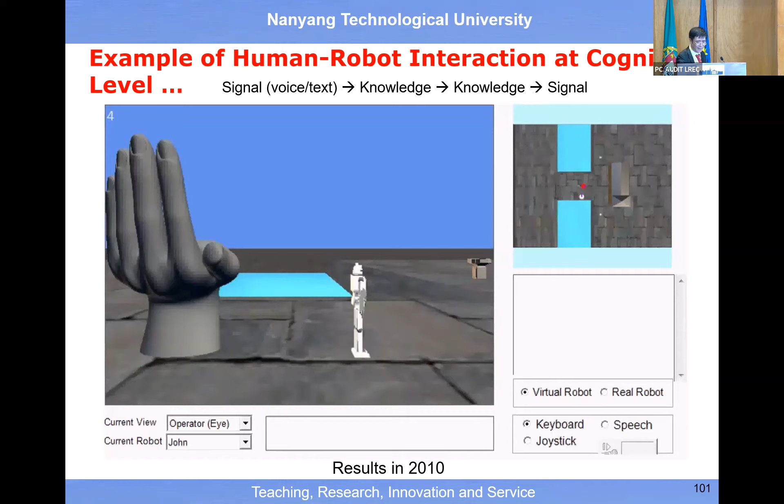In particular, we can use human language, natural language, to interact among ourselves. In future, this is a scenario we would like to achieve: let robots master human language, so robots could interact with all kinds of people. Today, if you want to instruct a robot to do something, you need to know how to program a robot. If a robot can master human language, then everyone can interact with the robot. This is a research result done by us with funding from the Singapore government, to develop human-robot interaction with the use of human language, not at the signal level. So I skip this one.

And here is a typical example of human-robot interaction at a little bit cognitive level: just focus on the hand which is closer to the eye, just a little bit of meaning there. But this one actually shows you this pipeline of transformation from visual signal to knowledge, knowledge to knowledge, and then knowledge back to motor signal. So this helps you understand we must focus on this pipeline of flow, which includes signal flow, motion flow, and knowledge flow, etc.

Besides transformation of a sensory signal into the cognitive state of knowing the meaning behind the signal, another important aspect of the motion flow is biped walking. Because stability is a major concern on Earth, we need to overcome the gravitational force acting on the sagittal plane and the coronal plane.

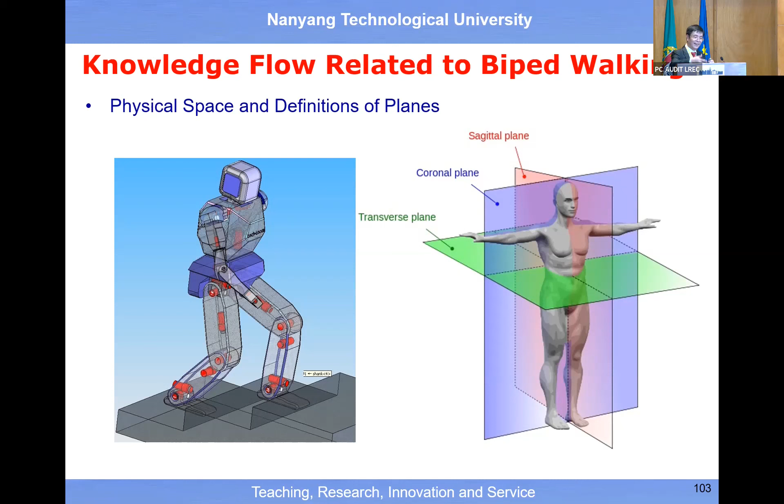So in these two planes, the vertical plane, stability is an issue, right? And I guess there is some discussion about what do we mean by stability. Is there any definition of stability? Here I just help a little bit to understand. Actually, we have two types of stability: one is the stability of dynamic walking, the other is the stability of static walking.

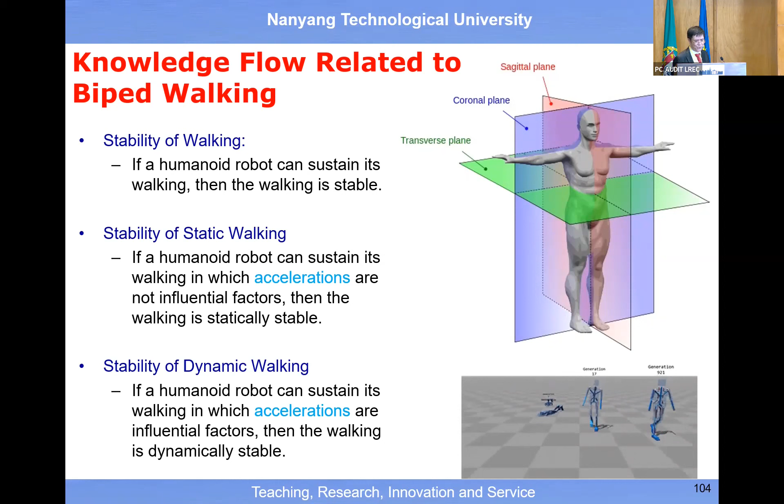For dynamic walking, acceleration plays an important role, so then we talk about the stability of dynamic walking. If acceleration does not play a major role, then it is the stability of static walking or something like that. So still, again, there's some discussion there.

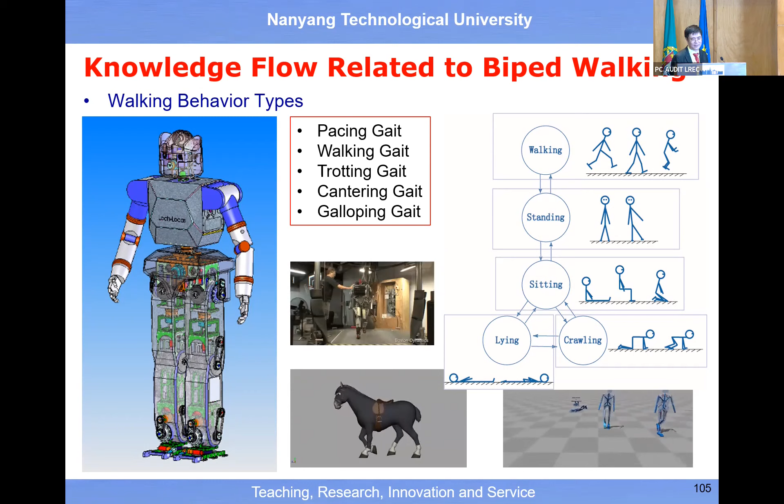And it is also very interesting for us to try to understand the animal with 4 legs, because 4 legs can actually be divided into 2 bipeds. So we can consider a 4-legged animal to make use of a pair of biped walking systems. They coordinate this pair of biped walking systems in order to achieve stability. So it is quite interesting.

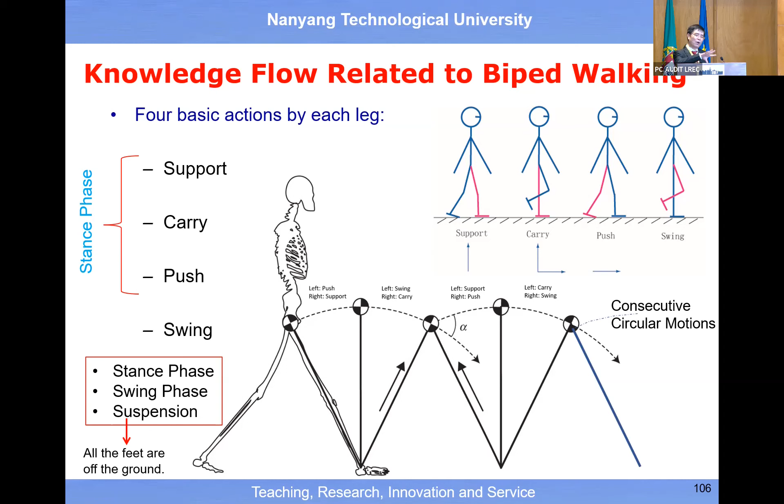It's also very important for us to understand the action, because on top of a motion, there's an action. We need to know what action is delivered by each leg. Here you see the 4 major actions delivered by each leg: support, carry, push, swing. Since we have 2 legs, we can have different kinds of combinations. This may help us better understand the biped walking mechanism, instead of just talking about single leg support and double leg support.

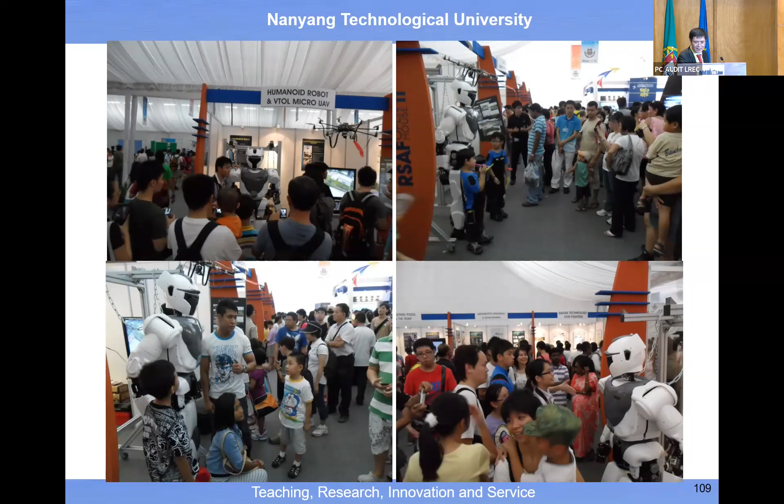And today, to achieve stability, the knowledge about biped walking is more or less there. This is just showing you we have done some exhibitions of our robot. It attracted a lot of public interest. We also reduced the size of our robot to a handphone-size robot, so in this way we may have a robot tutor for students. And more or less I achieved this goal of finishing this lecture within 1 hour.

Another aspect is the two worlds. I guess more people are starting to agree. We have a physical world, and we also have a conceptual world, or mental world. So we must make a connection between these two. Then we have three types of intelligence: human intelligence, computer-aided human intelligence, and machine self-intelligence.

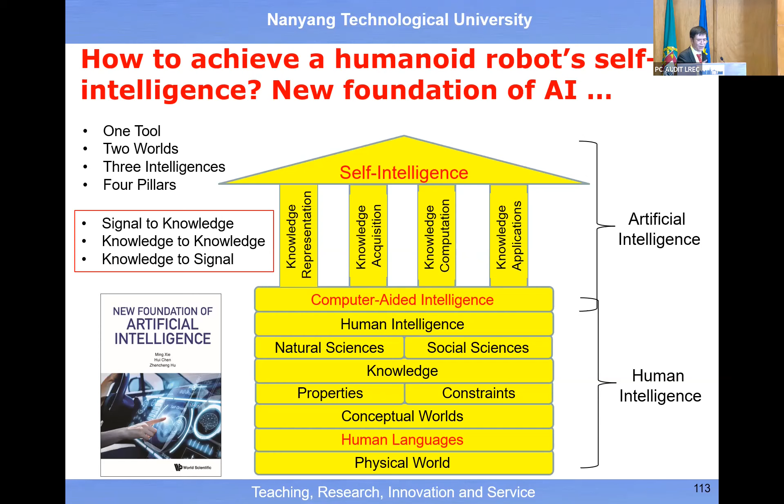Then we have four pillars: how to represent knowledge, how to acquire knowledge, how to compute knowledge, how to apply knowledge, etc. But always remember this loop: transformation from signal to knowledge, knowledge to knowledge, and knowledge back to signal. And with our work, I believe the history of AI is upside down now. The first generation aimed at a very high level. The second generation talked about development and learning. Actually, I believe the true foundation of AI should be language and cognition.

When we study robot intelligence, machine intelligence, it's always good to compare human intelligence and robot intelligence. When we do research on machine learning, it is always good to compare human learning and robot learning, etc. And we should never forget this prerequisite for any machine to undertake self-learning: we must make the robot educable first.